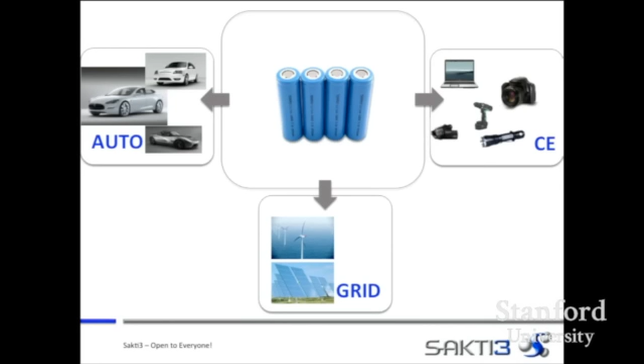As such, it addresses billions of dollars in value. Most importantly, though, it affects our lives in ways both simple and profound.

In consumer electronics, the market sizes are enormous. Within a few years, we expect to see markets in excess of $4 billion, principally in smartphones and laptop computers today. I'll talk a little bit about what the next markets are going to be in a moment.

In automotive technologies, we project over $3 billion, and that really depends on when the launching point for electric vehicles will be. How many electric vehicle fans in the audience? I see you, charging stations.

So I say not if, but when, and I know the people who raised their hands agree with me on that. It's not just because generically we want to see clean technologies on the drivetrain, but from a life cycle analysis standpoint, an economic analysis standpoint, and a sustainability standpoint, we really think this is a very good solution for powering personal transportation.

An improbable thing happened: gas prices went up enough to make it actually pencil out to buy a hybrid electric vehicle. How many drive a hybrid? You're actually doing a good thing for your family finances by doing that. 10, 15 years ago, it was maybe a break-even proposition. Now that's not the case anymore.

As we've seen market penetration of hybrid vehicles, we think there's a very strong economic case for electric vehicles if we can get the energy density up and the battery cost down.

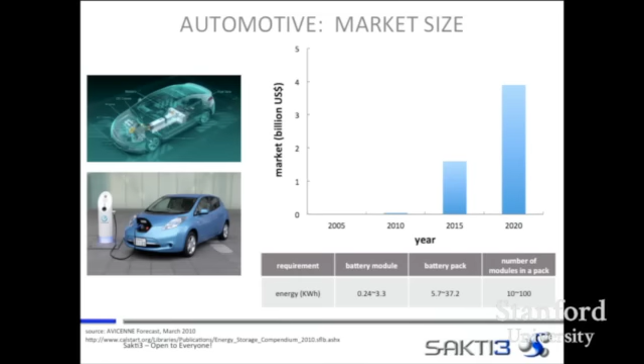In grids, most of the world has substandard electrification—most of the important parts of the world, most of the economies that are going to come online and join the first world economies. It's interesting how we accomplished electrification in this country: with large public works projects, principally TVA and all that followed. In China, Three Gorges Dam was an example of that, very similar to how we accomplished our own electrification. What's likely to happen next are smart grids.

How many work on smart grids? That's likely to become a more efficient way of doing things, and as more or less an applied mathematician, I find that very satisfying. But more importantly, it has the potential to bring renewables onto the grid mix more efficiently. What enables that, of course, is energy storage, and those markets will be large.

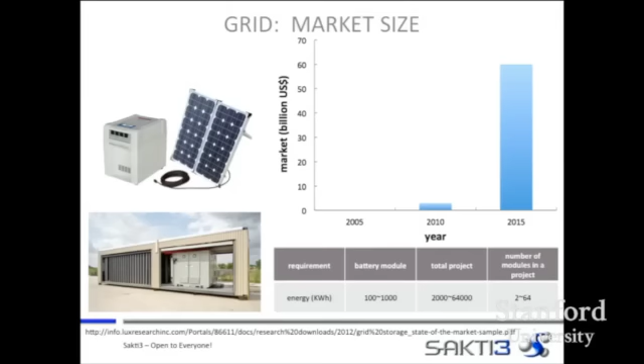So batteries don't actually enable everything we'd like to see just yet, and the principal reason is they cost too much. Certainly energy and power density are important, but the cost is presently a little too high to have everything we'd like to see.

People really complain a lot about the battery cell technology in their smartphones. It's an easy thing to notice: after a couple months, after 4 or 5 months of using your smartphone, you experience capacity fade. It takes longer to charge up, the battery depletes faster, and if the battery gets warm, that condition worsens.

Over time, you're walking around your house or your office with a recharge cord hanging off your battery cell. And the reason for that is complex. There are multiple reasons for the failures inside the batteries that limit its lifetime and performance, but it translates into something that consumers can readily see.

By sector, there are different challenges. So in consumer electronics, the today markets are obviously laptop computers and smartphones. Next are wearables, clearly. How many are wearing a wearable device right now? Those are the engineers, right?

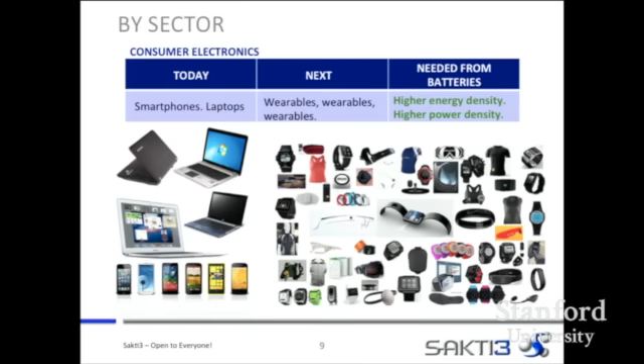Wearables are likely to become a very important pathway to connection to the internet. And battery technology is not sufficient right now to enable the small devices that people really want. Wearables are a little bit larger, a little bit less energy dense, and a little bit expensive. So what's needed is higher energy density and high power density. And it's not the expense in this case, because the willingness to pay for a very high energy density technology, a wearable device that you don't have to charge up but every couple of days versus 2 times a day, is actually really high. So people are willing to pay for that, especially in light of the fact that the wearable device itself can be rather expensive.

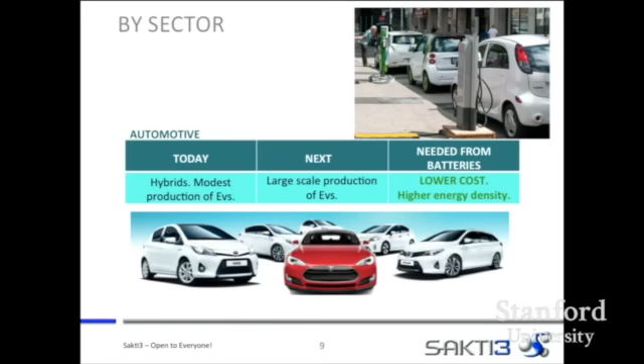In automotive, by contrast, the today markets are really hybrid vehicles and some production of EVs, but small run productions in general. The next markets, we believe, will be large-scale EVs, so lower-cost EVs, so that everybody can have an electric vehicle. And what's needed there is not only high energy density for range. I mean, that's obvious. Everybody would like to have more range, more electrons in their electronic gas tank. More people would like to have range, but most importantly is cost. Battery pack today can cost upwards of $15,000 to $30,000, comprising a huge cost to the vehicle and making it relatively unlikely that we'll see market penetration for economy vehicles.

In grid, today there are demonstration projects and microgrids, and there are several municipalities around the United States and in other countries, of course, where there are some combinations, right? Some permutations of renewables, power electronics, electric machines, and energy storage, and various generation technologies. So a genset plus electric storage plus renewables is a common scheme for that kind of a system.

Tomorrow, the next markets are smarter grids that are larger, that can power homes, communities, municipalities at a larger scale. And again, what's needed there is higher energy density and lower cost. And when we look ahead to the grid battery cell, it's very similar to the auto battery cell. It's a larger capacity system. It has more stringent operating requirements, and it has more stringent safety requirements.

So by sector, if you summarize these things pretty simply and pretty quickly, you come to the conclusion that if you have a higher energy density, a higher power density, and a lower cost, you not only enable new products, but you create larger markets. All right, so that's pretty well understood. For those of you who may not recall how a battery operates, here are just a couple of slides to orient everyone. This is on discharge.

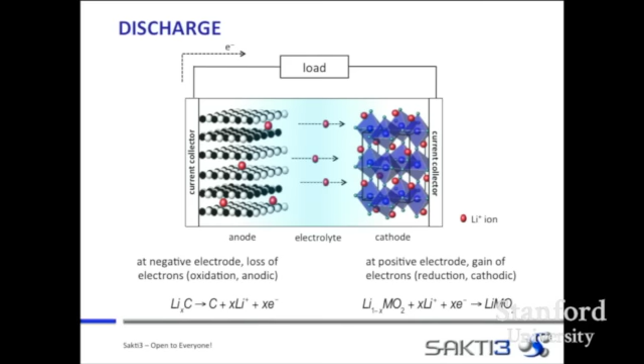So on discharge, at the negative electrode, there are a loss of electrons. The kinetic equations are written down. The anode and the cathode are separated by a separator. And in traditional batteries, today's batteries made by lamination technologies, a liquid electrolyte is used to allow transport of lithium ions from the anode to the cathode on discharge, and from the cathode to the anode on charge. And so lithium batteries are sometimes called rocking chair batteries, because rather than have a reaction at the electrodes, lithium actually intercalates into a material that's used as the cathode.

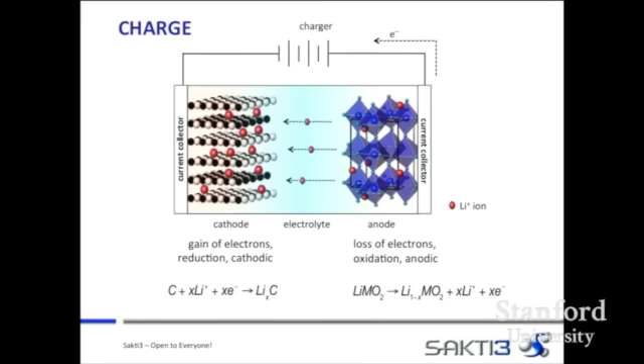And the toolkit for cathodes is shown right here. In the lithium electrochemistry, the cathode is the limiting electrode in general. And so as long as you provide enough lithium, the cathode is the limiting electrode. So the energy density of the cathode is theoretically the best you could do. Make sense? So you're always looking for a higher energy density or a higher gravimetric capacity cathode.

And here are some of the common ones. The X in LIX is the number of moles of lithium that intercalate into the cathode material, which is a measure of how much capacity that the battery cell in total will give. So in general, we always look for materials that can intercalate a lot of lithium. And if you hear that, that's why.

Now, that's the toolkit, and that's pretty common globally. Those electrode materials, the cobalt oxide, nickel, cobalt, manganese, NCA, iron phosphate, vanadium, silicon, these electrochemistries, to a smaller extent silicon, titanates, are globally scaled already. And in general, they're all made the same way.

In a production process that uses porous materials, trained in a manufacturing line where the particles are mixed first in a wet slurry, deposited onto a conveyor belt, and rolled or pulled through a slot die or doctor blade to a certain thickness, rolled, compressed to shape. A separator is placed over the top, then the anode, which is generally carbon with lithium, and then that whole cell is vacuum filled with non-aqueous liquid electrolyte. In general, there are 18 or more unit operations or steps in the production path.

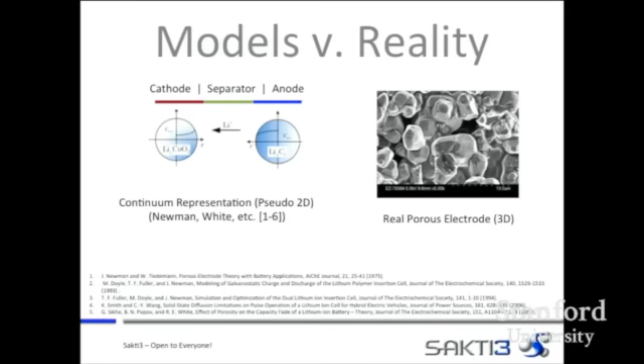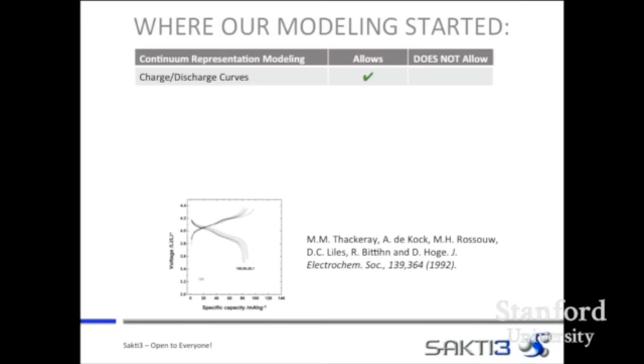When we started to work on this problem, it was clear that existing models allowed prediction of charge and discharge curves and allowed selection of high voltage electrochemistries, or high theoretical capacity cathode chemistries, that would give large total battery capacities. But they didn't allow direct incorporation of the microstructure effect.

So, any porous media people in the audience? Bruggeman's correction, right? Handy for volume fraction, but it breaks down at very high and very low volume fractions. And more importantly, it doesn't allow you to interrogate concentrations of stress, concentrations of heat, concentration of electrons or charge, and concentrations of chemical species.

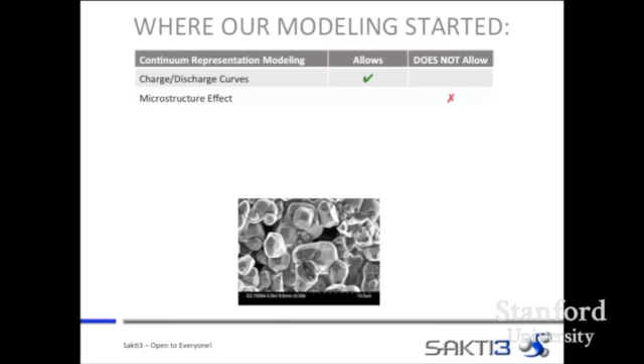Even though you can account for changes in continuum behavior by corrections such as Bruggeman's or other corrections to volume fraction, it really didn't allow us to interrogate how we select these particles. Should they be polydispersed so we can get high packing fractions? Should they be monodispersed? What should be the interparticle spacing? Some of those things you can actually control by selecting materials, and we really wanted to be able to do that.

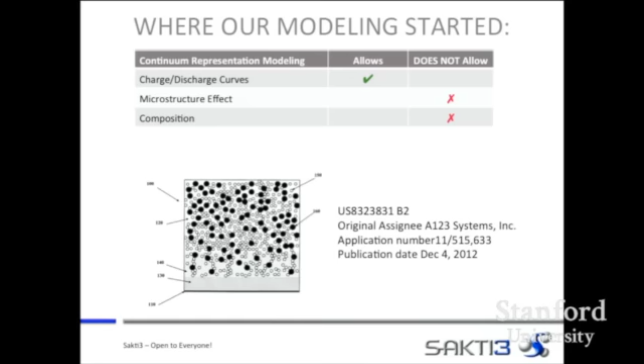A continuum model also doesn't allow direct interrogation of composition. When you assume one electrode or the other is a smooth, homogeneous continuum, it doesn't directly allow you to do the inverse problem: what should be the fractionation of this species? How much PVDF, how much carbon can I tolerate? How much surface area to volume ratio even? It doesn't allow you to look directly at failure.

And so there are a lot of pictures like this in the battery literature. Who are our battery people here? I can say whatever I want now, right? Raise your hand higher—who are all the battery people?

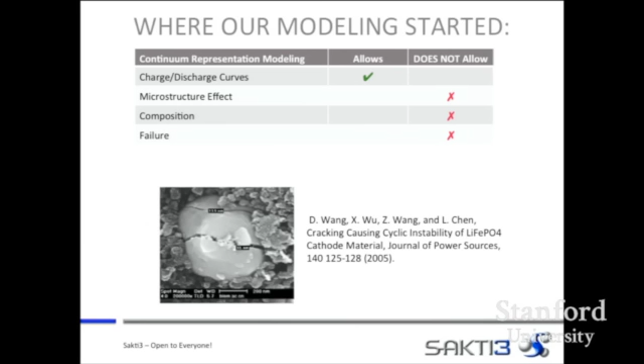Okay, admission, guilty admission. Yes, I know batteries have been the Afghanistan of the business world, but you see a lot of pictures of things that are putative failure mechanisms.

We had a question: where is this failure coming from? Because the manufacturing process actually incorporates large-scale deformations in these particle networks by compaction of the material under large rollers. So one of the questions we had was, are they breaking before or after you start charging the batteries? It looked pretty clear to us it was probably some combination of effects.

It didn't allow you to optimize microstructure. And this is something that we were very interested in doing because there were a lot of possible solutions.

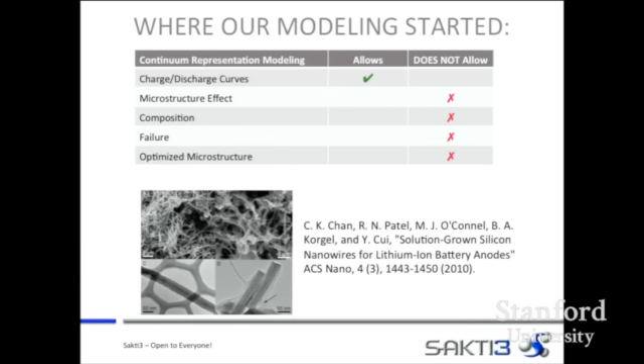So there's no point in modeling something and trying to wish it into existence. There were a lot of groups proposing microstructures, everything from foams, like was done in nickel metal hydride batteries, which were the forerunner to lithium-ion batteries - that was the last generation electrochemistry - all the way up to HIPCO-produced nanowires, nanotubes, and other kinds of microstructures.

So what we really wanted to do was write down a set of models where we were solving partial differential equations on the surfaces of those particles so we could decide what kind of particle microstructure to build. And then, of course, we wanted to be able to understand the manufacturing process effect.

To the earlier point, you induce some damage in manufacturing, and we wanted to be able to assess that, and certainly to be able to understand the difference between what we were doing to the materials in manufacturing versus what was happening to them due to intercalation stress.

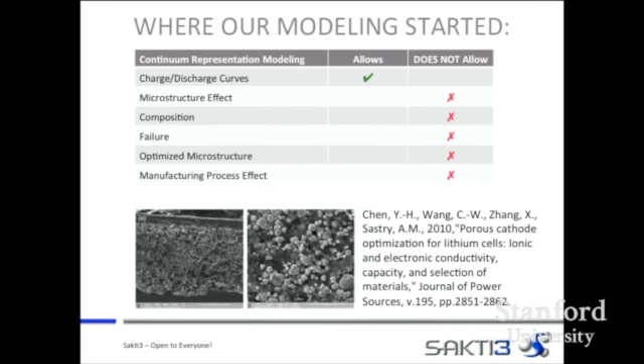Again, intercalation is when lithium nestles into the cathode and expands. Those can be coincident with very large volume changes, thus very large strains, thus phase changes in the material.

So if you put a large temperature change or a large stress change on the material, you've got a different material, you've got a different phase. And that in turn affects the intercalative properties of the material.

So it was important to us to understand where those stresses were coming from, whether they were intercalation induced, whether they were manufacturing induced, and also to understand the failure.

So we started to write some papers on mathematics, and this is what I mentioned before on percolation statistics, which is sort of a long time love of mine - critical phenomena and understanding the mathematics of the brink, the mathematics of the tipping point, the point at which you have at least one single domain spanning path of material that you can walk continuously from one boundary to another on. And that really is the onset of the beginning of the real change in transport properties.

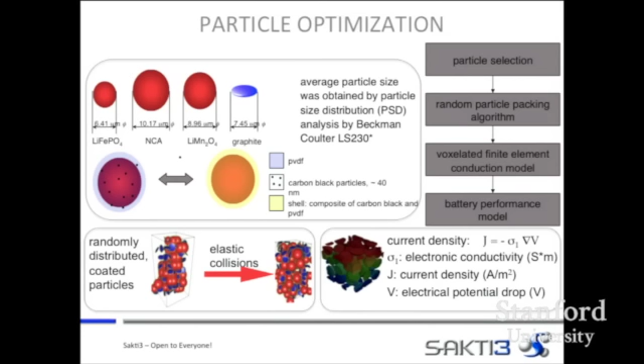So if I have a material that's non-conductive and I add some certain fraction of another material, at some point, at some volume fraction, I start to be able to conduct, right? And that point is a percolation point at which the material, which is the conductive phase, becomes connected.

And so the whole reason that people put carbon into battery cells in the cathode is in order to form those single domain spanning paths, in order to get conduction of the electrons. Because when you make a battery cell out of an oxide as the cathode, it's not very conductive. And for the battery cell to work, you need to be able to get electrons out.

So you need to add conductive additive to the point where for a certain thickness of cathode, I can actually conduct and get the electrons out and drive a load, which is the first picture I showed on discharge.

So we were looking at all of these different materials, and there were some closed form solutions for certain kinds of arrays - monodispersed spheres, monodispersed rods, and so forth. We wanted to look at everything at once because the shapes and sizes of what was going into the battery cells were quite diverse.

So we first started to write papers about what happens in monodispersed systems where you have triaxial ellipsoids, very prolate systems, oblate systems - what are the critical phenomena? And then we started to look at polydispersed systems, and then we started to write algorithms, which were called settling algorithms.

So we could put spaces in 3-space, assign particles to those spaces, apply gravity to the whole system, and start with something you could do computation on. Because you can't do computation on something where the particles actually overlap. So we came up with methods of writing algorithms to build the geometries that we do calculations on.

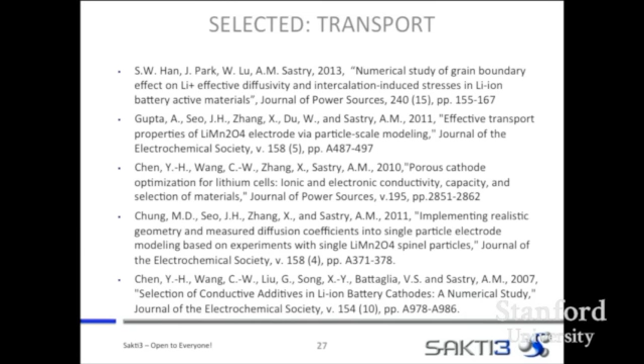Chemical engineers and material scientists, and anybody with an undergraduate engineering degree, it's just del-squared something equals zero. So the transport phenomena actually submit to the same analysis. And we wrote some papers about using systems that were long and thin, using spheres, etc.

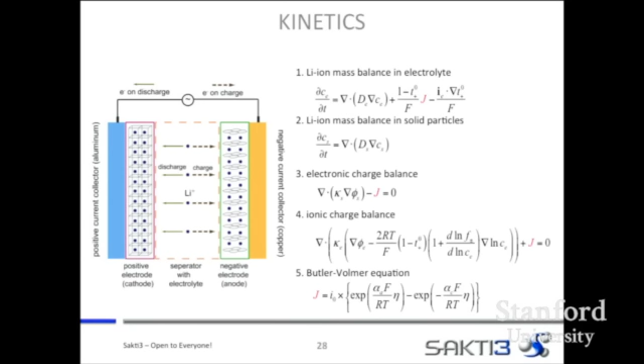Then we started to take a look at the kinetics. The classic kinetic approach in battery cells is really the Butler-Volmer kinetics, a semi-empirical reduced analysis which enables you to write down the constitutive law for a battery cell. We followed that same pathway laid out by Professors Newman and White and others, except that we wrote down the kinetic equations for the geometries of interest.

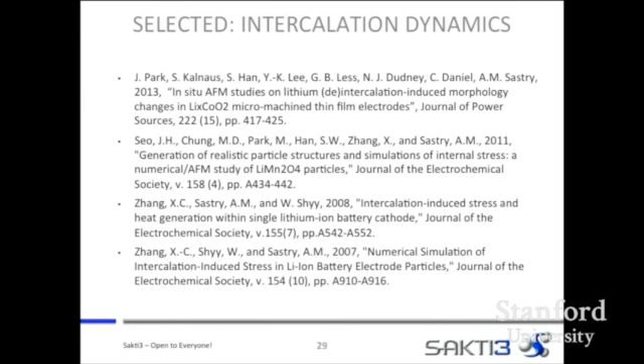So we began to solve these PDEs on these multiply connected complex spaces, and we wrote several papers on intercalation dynamics for various electrochemistries, towards understanding the relationship with stress. We did that by writing down the mechanics equations, which I'll show in a second, with a dilatational term representing intercalation dynamics. That was a neat way of incorporating two pieces of the multiphysics into the same numerical framework.

This is the mechanics, and again we have two big effects. One is pressure on the system — sometimes uniaxial load, sometimes pressure. That was due to manufacturing stresses, and in some cases due to face pressure, because when battery cells—

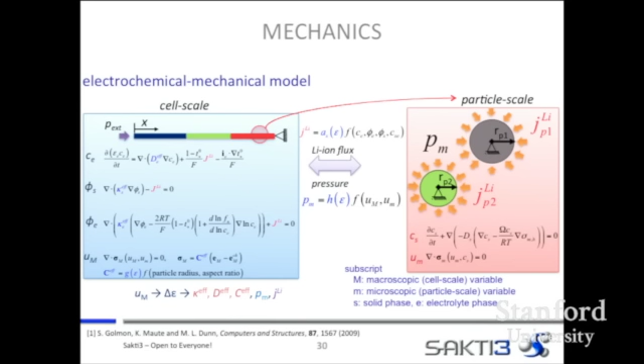Batteries swell, and what happens is during cycling of a battery cell, they irreversibly form lower density compounds, and they swell. Normally we ascribe that to reactions of the electrolyte with the cathode, and that's pretty much what they are. But the bottom line is that swelling in a canister of a battery cell causes pressure on the face. In a cylindrical cell, it causes multiaxial stress. In a prismatic cell, it causes face pressure.

So we wanted to look at that too, because it ends up being really important in electric vehicles — important because you have to figure out the size of the casing for the battery cells. Understanding what the face pressure had to be in order to keep conductivity high was important, so we incorporated that into the analysis.

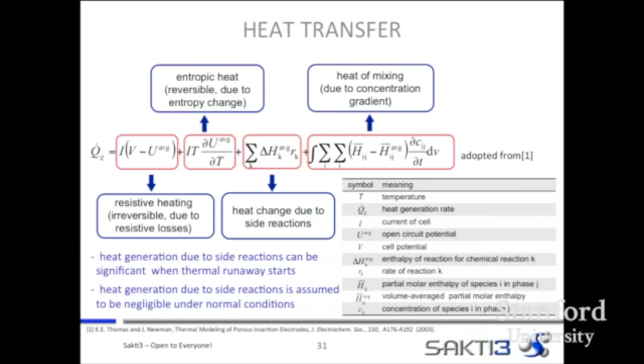We also worked out a representation for heat transfer, which allowed us to simultaneously look at resistive heating and entropic losses. That was important because, again, for phase change, we wanted to know whether we were still cycling the same compound we had started with. So we developed a framework around that.

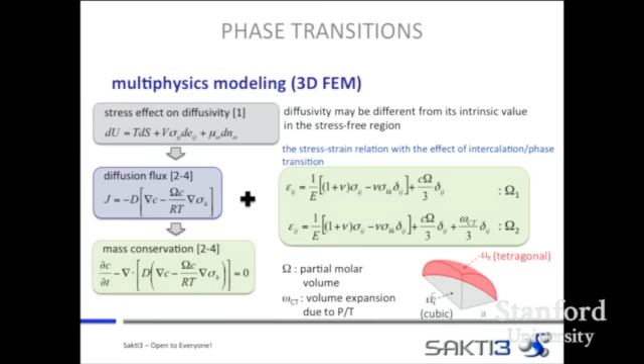And then finally, phase transitions in this part of the talk. So we looked at the stress effect on diffusivity, the flux, we applied mass conservation, and we were able to solve the PDEs on the surface of all these different particles for multiply complex regions. And we wrote a bunch of papers about that.

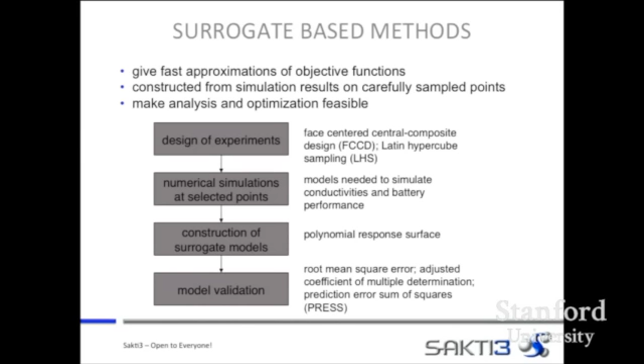Finally, in optimization, we use surrogate-based methods. That's a robust way of arriving at minimum energy solutions when you write out a set of partial differential equations which describe physical phenomena, and you're looking for local minima. Then you're trying to either minimize cost, maximize energy density, maximize power density, or apply some weighting function to certain objectives. So what we wanted to do was systematically compare battery performance based on changing what went into the batteries. It was important for us to develop that framework.

And of course, we wrote a number of papers about that as well, including degradation mechanisms. So to summarize the key effects we looked at over around 20 years or so of work on the subject: dissolution and deposition, looking at dissolving the cathode and its effect on battery cell performance, SEI layer morphology evolution, and gas generation being the principal root causes that we thought of as important in degrading battery cells.

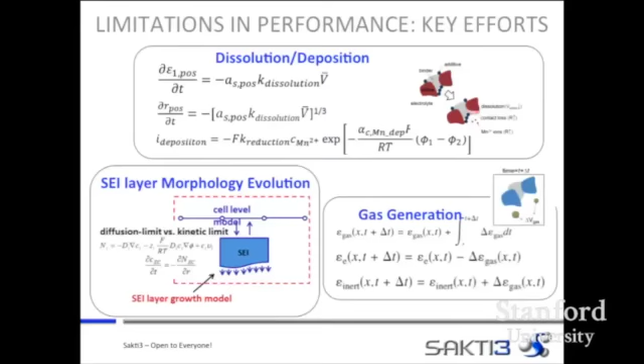Then we thought, this is great, okay? So now we've got a framework, and we can systematically look at the trade-offs between some important parameters, and I'll show you a couple of those.

One is ionic versus electronic conductivity. For ionic conductivity, you want the lithium in the anode to race to the cathode, and then you want it to race right back. You want to recover 100% of it. You want as reversible a reaction as you can, and therefore you want the ionic conductivity to be very high, right? Liquid electrolytes make sense on that basis because they tend to have a really high ionic conductivity, in general higher than a solid, okay?

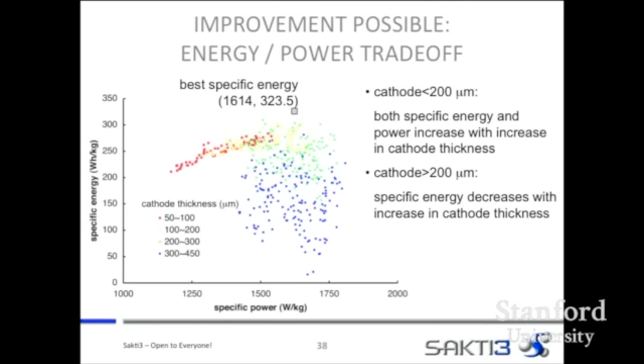We also looked at energy and power. For a high power system, students in the room, what do you think you'd want - a very thin electrode or a very thick electrode? Why? There's resistance in going through the electrode. Precisely. You don't want to deal with all that resistance, right? You want to get the electrons and the ions out fast, and so thin makes a lot of sense. It's all surface area - everything's sitting right there on the surface, very accessible, right?

For energy, you want the reverse, right? You want a really high capacity, and you want to reduce parasitic masses. So you don't want to pay for things like a large amount of electrolyte or a huge separator in your system. You want a nice, big, thick electrode. Again, you're at odds, right? So looking at the trade-off between energy and power was very important. Typically in commercial cells, you'll see cells advertised as either high power or high energy, but generally not both, because the thicker electrodes tend to be the energy cells, the thinner ones tend to be the power cells. We looked at specific energy against specific power, and again, for cathode thicknesses, identified where you would find commercial sweet spots, where you would find combinations of specific power, specific energy, and cathode thicknesses. It sort of made sense.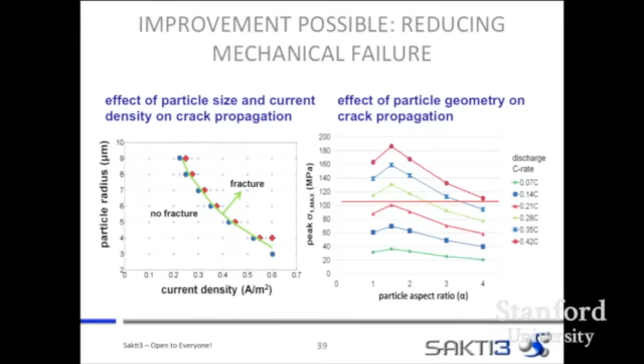And so we identified some ranges, and it turned out that there was a small enough particle where you were unlikely to get propagation of failure. So that was handy. So these are the key findings from us and others.

First, there were limitations in particle shape and size improvements. Second, there were limitations in terms of conductivity versus reduced energy. Third, optimization results were indicating that we didn't really expect to see much more than a 20% improvement in energy density or power density or the like. So that wasn't as good.

We had begun this journey hoping to really look at how much things could be improved, with the thinking being: okay, with the 5-volt materials coming online, with very, very high energy density cathode particles, can we reduce some of the conductive additives and really see a generational change? And we really weren't seeing that.

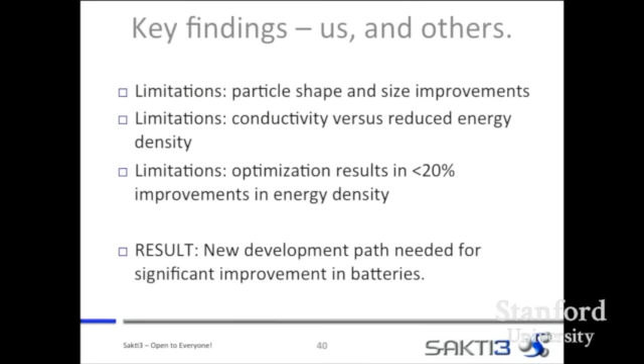So the result of that was that we really felt we needed a new development path for significant improvement in battery cells. And so now into what we think of as the interesting part: the best way to build a battery if you could do it at low cost.

So you have a number of choices: 1D, 2D, and 3D. Generically, we can think of a 1D material like a rod, and you could distribute the active material like a 1D object. 2D would be like a plate, and 3D would be sort of a sphere. In the limit, where you have all of the active material in 1D, it's really a thin film, because that's a 1D phenomenon. You're moving right in the Z direction in the film. So you can think of 1D, 2D, and 3D in that way.

You can do a thought experiment with geometries defined then. And the thought experiment is like this: suppose I distribute the active material as a sphere, a rod, or a plate, a thin film, 1D, Z direction only. Can I calculate the diffusive properties and the packing fractions that tell me which is the fastest horse to ride? What's the path to really deliver on? Because as you saw in this picture...

And so with all these choices, we wanted a framework. And this is actually a paper that we're just finalizing now, Dr. Park, Professor Liu, and I.

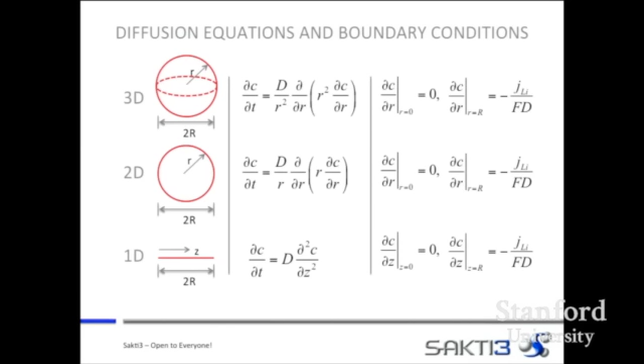So here are the diffusion equations and boundary conditions, and they're pretty standard. You have a flux at the outside of the object and nothing at the inside - no flux at the inside. And you look at diffusion as it moves through the object, as a sphere, as a rod, or in a plate in the Z direction.

You can quite readily and directly calculate the volumetric capacity. Assuming some diffusion coefficient, you can quite readily calculate what happens to a sphere in a box, a cylinder in a box, and a cube filled with space-filling material. And then you can quite readily calculate what the diffusion limited capacity is.

Now, it's a little bit obvious that for this case, for really small particles, in the limit as your particle dimension goes to epsilon, or epsilon goes to 0 even, they all look the same. For really little particles, it doesn't matter if they're rods or spheres or thin films, it's all the same. As the particles get bigger, as the thin films get thicker, though, the differences start to emerge.

The other thing to look at is that as the C-rate, as the rate of charge and discharge increases, there are also differences. And the thin films don't look as good, because you can't get across them - they're too thick.

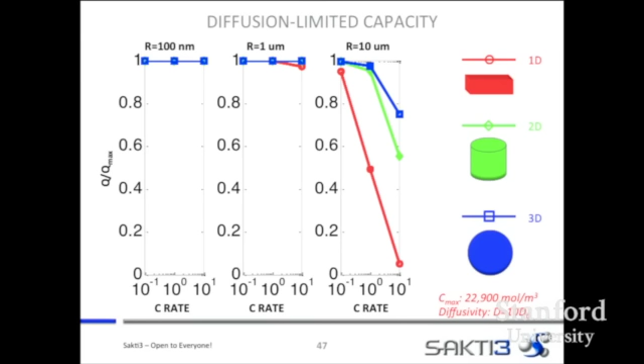If you increase the diffusivity in this example, in this little thought experiment, by 10x, the differences start to disappear. So if you develop on the path where you have improved diffusivity, all of a sudden the differences between these nanoarchitectured materials and the thin films are not as significant.

But there's a wrinkle. It's not just diffusivity that matters, it's also packing fraction, because you can't have a space-filling system of rods, and you can't have a space-filling system of monodispersed spheres. You're limited in how many you can pack in.

So when you factor that in, the analysis reverses, the result reverses. And actually, the highest capacity system is the thin film for the low and mid-range thickness. The sphere is actually the worst in those two cases. If you then develop along the line of making a more diffusive system, your thin film almost always wins.

So when we asked the scientific question, what path should you develop on, we said solid state, okay? And work on the diffusivity.

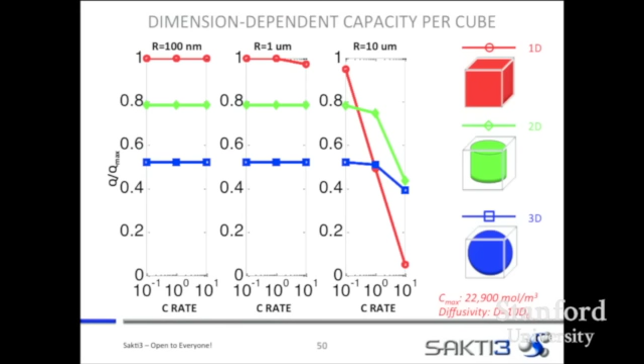The other thing to note about this calculation is that these numbers are for lithium manganese oxide, which is a very typical cathode material used globally today. The C rates are: C over 10 is normal for consumer electronics, C rate is very fast for consumer electronics and sort of normal for cars.

A 10C rate is about the highest you'd ever really ask a battery to do. Most of that high C rate can be accomplished with S-P configurations rather than simply discharging a single battery cell at a very high rate. So this is really a very practical set of projections, and this is why we are working on solid-state batteries.

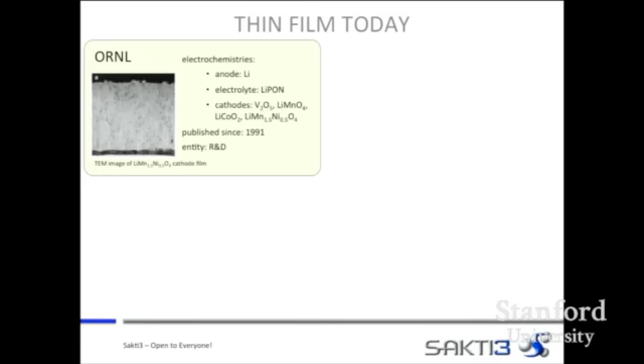Thin film today really had its genesis at Oak Ridge National Labs with John Bates and Nancy Dudney, who's been a collaborator of ours. At Oak Ridge, starting in about 1991, there were a number of different cathode electrochemistries that have been explored. There are a few companies doing this now.

Most are making very small batteries, and most of the incumbents are also working on the cobalt oxide system. It's challenging to do this cheaply. So the other thing we decided to work on when we started a company was doing it on a low-cost manufacturing platform. And interestingly, when we project the price, it's millions and millions of dollars per kilowatt hour.

So here was the riddle: you want to take what's good in today's commercial systems. Everybody's seen videos of laptop fires, probably on YouTube. Well, maybe you look at different things on YouTube than I do, but you might have seen a picture like that. That in itself is not so bad - you can put a system over that to make that system safe, right?

So we do that all the time in engineering. We start with things that might be intrinsically unsafe, and we build systems over them - controls, mechanical systems, fire suppression systems, and so forth. So that's not so big of a deal. The cost, though, is a big deal, because the cost of the cell alone for a high-end system is $500 per kilowatt hour. When you put all of the system costs over that, it's actually quite expensive.

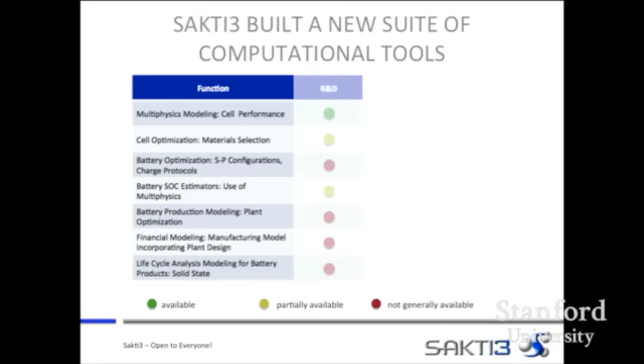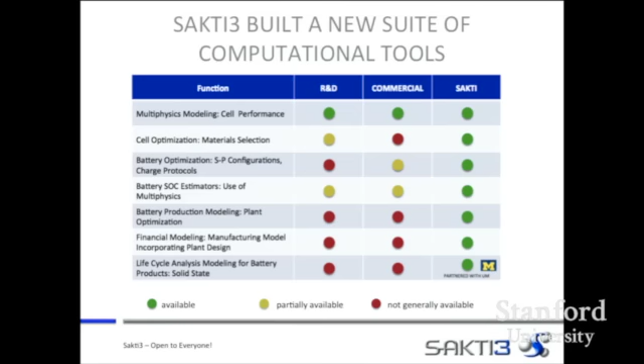R&D codes had some elements of all of these. Commercial codes had some elements of all of these. What we did was put them together so that the handoff at each step - and it's harder than it sometimes sounds to do - to make sure that everybody's using the same notation, everybody's handing off the same variables, and you do enough tests every time you make a change in one piece of code so that an error doesn't propagate. So it's actually very challenging to incorporate all these areas of science and mathematics, but that's what we set out to do, because we knew when we got to that bottom box, we wanted these products to make sense.

So we built design codes: cell performance, cell optimization, state of charge estimation, battery optimization, plant optimization, battery cost forecasting, and life cycle analysis. And these are what we projected.

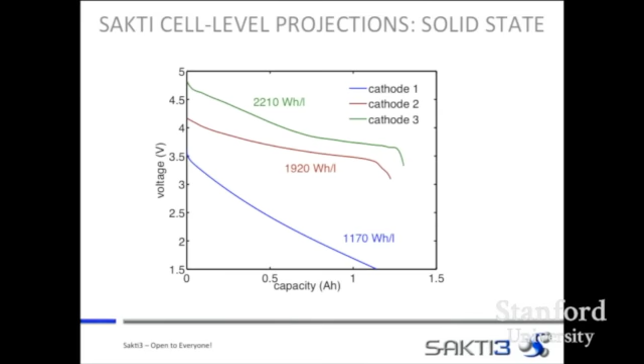So we looked at about a dozen different electrochemistries before settling on the first one we decided to work on. And we projected pretty big improvements in energy density, which was our number one thing to work on. We also did a lot of optimization of thicknesses of the components before we ever started manufacturing anything.

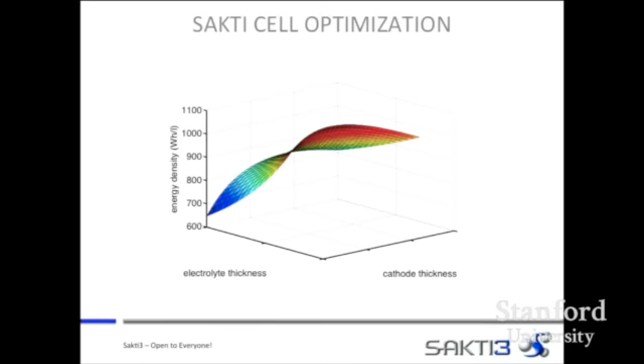Before we ever started prototyping anything, we ran the codes to figure out how thick and thin things needed to be, how fast we needed to produce them, et cetera. Then we started building prototypes, and we continued to build the codes as we built the prototypes, building them cheaply using the computational results. Rather than drop into a system that can't make it at scale, we wanted to make sure we only executed prototypes that actually could be scaled.

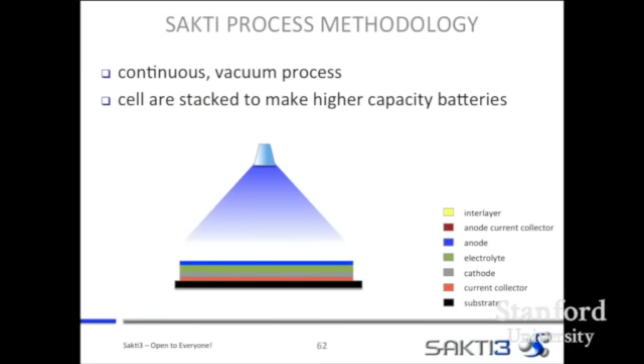This is the generic process methodology: substrate, current collector, cathode, electrolyte, anode, anode current collector, and an interlayer, and then repeat. The cells are stacked to make higher capacity battery cells. Using this kind of process, you can actually dismantle some of the cost structure.

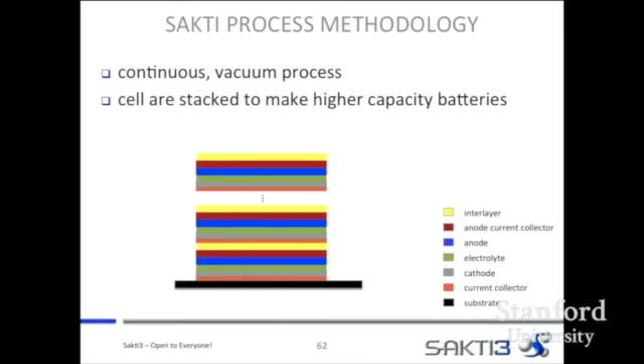The device methodology is thin electrodes in the micron range rather than thick electrodes in the hundreds of microns range, pursuant to the discussion earlier that you want high enough diffusivity and conductivity for a high enough energy and high enough power cell, with no additives required. That's a boundary condition, because if you start putting platinum into your battery cells, you're not going to make them cheaply enough for everybody to have an electric vehicle.

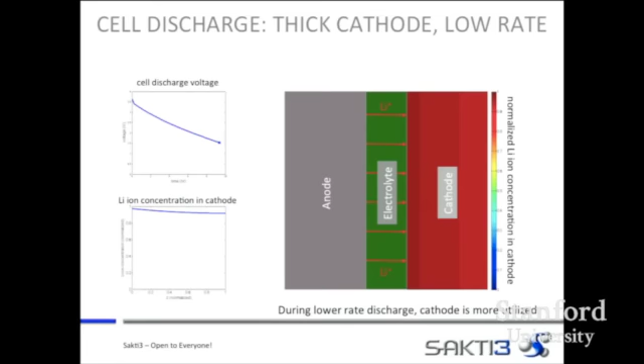A thick cathode at low rate is all red, fully utilized. So thick, thin, high rate, low rate, we ran lots of recursive calculations to optimize the battery cell's dimensions to accommodate the load profiles we thought were important. We also developed some other unique capabilities.

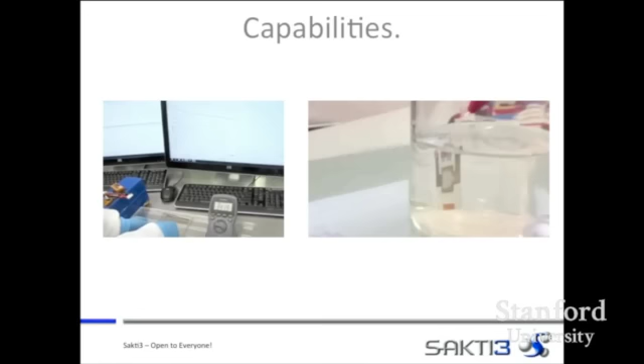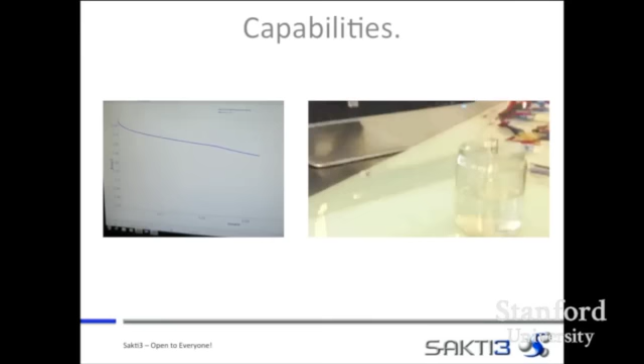In the movie on the right, one of our Sakti3 battery cells packaged with our inline process is dunked into a jar of water. Briefly the voltage drops because the leads short to each other since the water is minimally conductive. The battery cell is pulled out, and the voltage comes back. Again, these are capabilities you can do in solid-state battery cells that are difficult, if not impossible, with the incumbent technology.

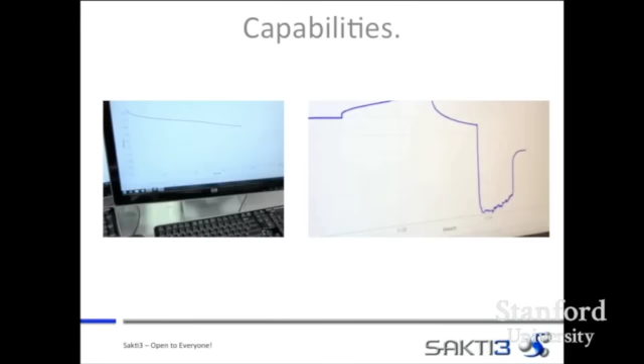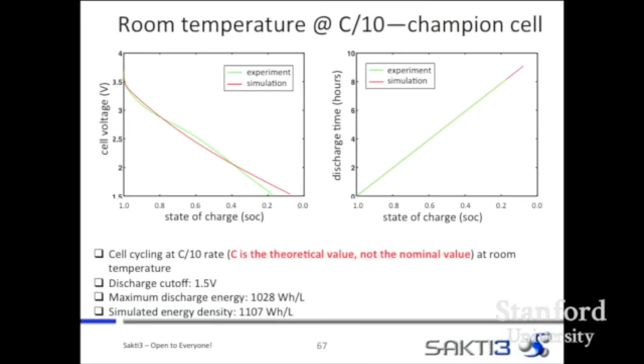In addition, these cells have very high energy density. This is one of our champion cells showing over 1,000 watt-hour per liter, approximately double what's in the marketplace now. So you get very high energy density, good safety, and some unique properties.

We think that's an appropriate new development path. These are data from Panasonic showing that battery cell energy densities have approximately asymptoted over a couple and a half decades of development work. That fits with what we understood to be happening based on our simulations. Solid state is a completely different development path. So if you had a great material, make it into a solid state battery.

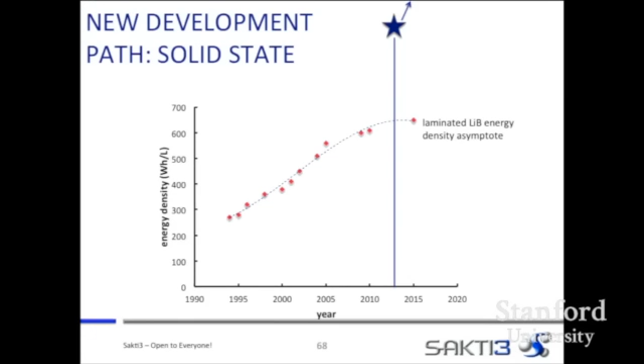So then you might ask, well, how soon can all of this happen? How fast can new technology scale in batteries? The answer, as we see it, is pretty fast if the technologies have the same manufacturing platform.

Now, people complain a lot about batteries. We're for that, of course, but people complain a lot that there haven't been new breakthroughs in 20 years, 30 years, and so forth.

But actually, if you track what happened in new electrochemistries, it hasn't been all that long. If you look, since the invention of lithium cobalt oxide, it took 31 years until it was scaled globally, and it's an expensive technology. Iron phosphate took 16 years or so, and NCA and NMC took 12 years. So from the invention of materials with higher energy density to scaling globally actually happened pretty fast.

And part of the reason was there was an established supply chain. Batteries are all basically made the same way. That's not to simplify the hard work done in training new materials and new processes into plants, but generically the supply chain was already in place.

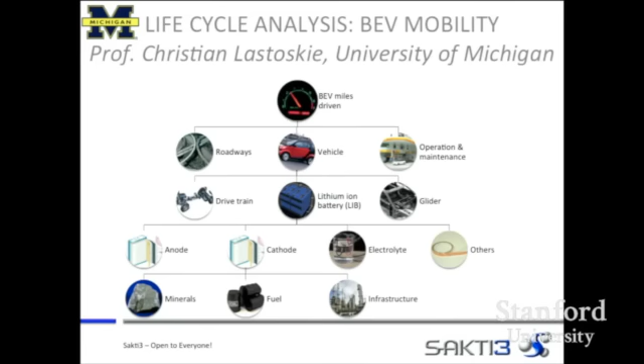So if everything were to flip to battery cells, specifically solid-state battery cells, what would happen? Professor Lastoskie's group collaborated with us, we just gave data, they did the analysis, but the cumulative energy demand index and global warming potential for solid-state versus laminated versions for a few electrochemistries show that not only are laminated battery cells favorable over an IC engine-driven drivetrain from a life cycle analysis, but the solid-state versions are even better.

That's gratifying. Part of the reason is that the solid-state versions are so much more energy dense. It's not only because the materials can be entrained more readily and recycled more readily, we think, but also just because you're kicking out more watt-hour per liter from a plant.

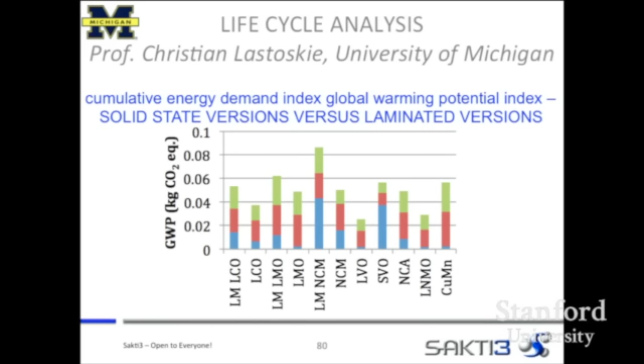So to conclude, it's a lot of batteries. We think that solid state has a very good development path going forward. I certainly hope that everybody in the room working on your own technologies will start to think in advance about these issues prior to working on inventing a new technology.

When I was a young engineer at DuPont, the plastic bottles had a large unintended consequence. The inventor of those plastic bottles spent the last 10, 15 years figuring out how to recycle them. It would be great if everybody in the room, and I hope we'll be successful in this, thought about these things up front, thought about the life cycle analysis up front.

And the reason, in the case of batteries, is that it's a huge, huge set of markets, just enormous. 6,800 million mobile cellular subscriptions, 90 terawatt-hour per year. In vehicles, 7,600 terawatt-hour per year just in energy use, just in the United States. And that's dwarfed by the global figure, which is 29,000 terawatt-hour per year in energy use. So the way in which these materials are recovered and recycled, and the importance of establishing a profitable means to recovering those materials, cannot be overstated.

So to conclude, these are the tenets of our company. This is what guides us. And I want to say thank you for having me. Thank you very much.